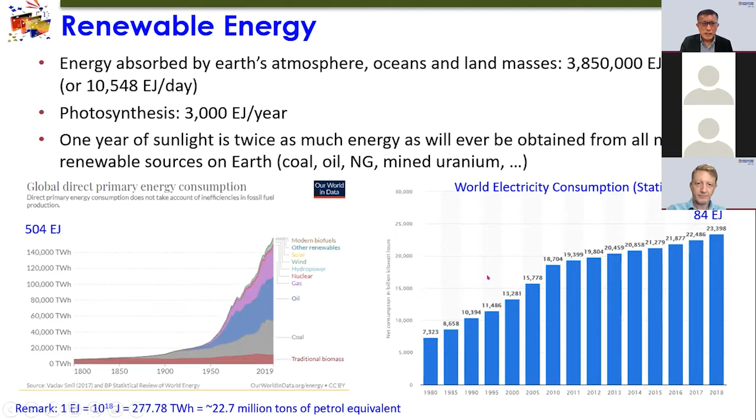So one year of sunlight is twice as much energy as will ever be obtained from all non-renewable sources on Earth, including coal, oil, gas, and uranium. Imagine that one year is not just sufficient, it's twice the amount of non-renewable sources. Since we have all this energy, then what are the issues? Just to capture a few, the most serious one is the spatial and temporal distribution of the energy.

Spatial is geographical. Certain countries have oil, certain countries do not. Certain countries have strong wind and solar energy, but certain countries have nothing. For example, Singapore has a little solar energy, but other than that, we don't have any other good source of renewable energy. Temporal distribution is a function of time. For example, with solar energy, during the daytime we have solar energy, at nighttime we do not. So it differs in the time domain. In other words, we are unable to match supply to demand.

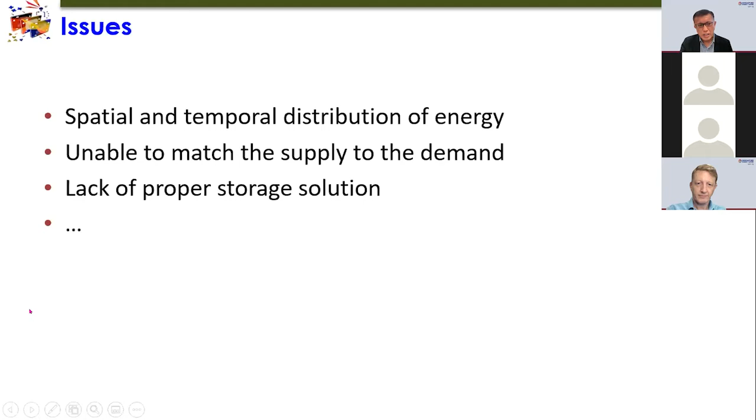And of course, there is a lack of proper energy storage solutions. Apart from this, there are many other things like financing. Certain poor countries are unable to have a power plant, even if they have oil. So there are financing issues, and also some political issues. There are many others.

I'd like to share this: thermodynamics applied to a multi-energy system. This is the only equation that I use. It is the energy balance applied to a control volume. In thermodynamic terms, all energy on Earth can be classified solely into three types: heat, work, and mass. For heat, you all know we have conduction, convection, and radiation, and this leads to heating and cooling. Work can be mechanical work, but here we would like to focus on electrical work, which is electricity. Mass is easily understood. Coal, oil, and gas, these are mass.

So if we look at a township, a city, a town, and draw a boundary around the township, then the township is a system.

It interacts with the surroundings in terms of these three types of energy: heat transfer, work transfer, and mass transfer, which is the left-hand side of the equation. So these are the so-called parameters across the system boundary, whereas the right-hand side is the change of the properties within the control volume itself, right?

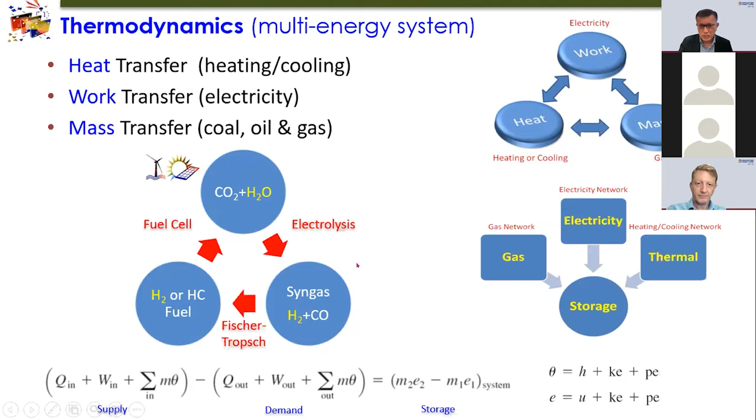This is a busy slide, and I'd like to share with you the evolution of energy use. Let's look at the right-hand side of this diagram. The x-axis is the year, the y-axis is the ratio of hydrogen to carbon, the HC ratio. We started the plot from 1800 and end with 2100, the end of this century. We started from here because hydrogen was discovered in 1766, and the name was coined in 1783, around this time. So then let's look at the red dot.

This is post-industrial revolution, where the demand for energy increased. Earlier on, we actually used wood to supply the energy that we need. Then we moved to coal, then oil, and finally methane gas. Today we use more methane than ever. As you move along the years, the HC ratio increased from 0.1 to currently 4. In future, we expect to use hydrogen when we move towards the renewable energy era. So this is the evolution of energy use.

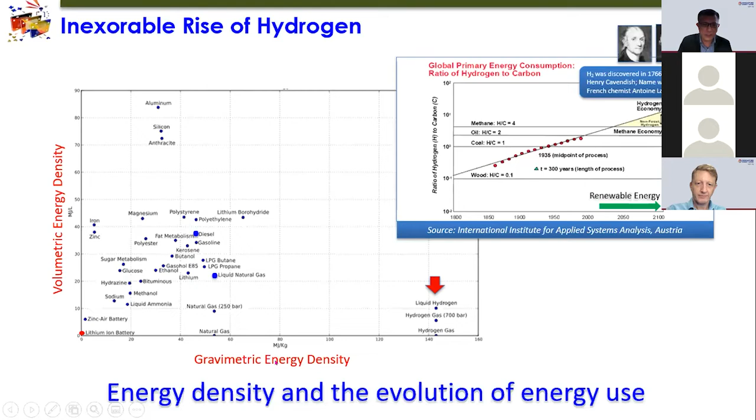But luckily, hydrogen can be compressed to increase its volumetric energy density. Liquid hydrogen is about 10 megajoules per liter. This is the highest among different types of energy in the gravimetric energy density sense. So ideally, we want to find types of energy or energy carriers that have high gravimetric and volumetric energy density.

So let's look at the demand. Energy density, particularly important for off-the-grid applications. A car requires 2 gigajoules of energy. A bus increases to 20 gigajoules. A380s, 11 terajoules. Space shuttle, 27 terajoules. And the big cruise ship is about 300 terajoules.

Right. Now let's look at what energy we have. Hydrogen, as I just mentioned, we can compress at different pressures. The gravimetric energy density, based on the higher heating values, is very high. It's not an issue. The issue is with the volumetric energy density. And look at liquid ammonia. The gravimetric energy density is not too bad, 22.5 megajoules per kilogram. And the volumetric energy density is actually higher than liquid hydrogen. So that is why there's a lot of interest in liquid ammonia for ship propulsion.

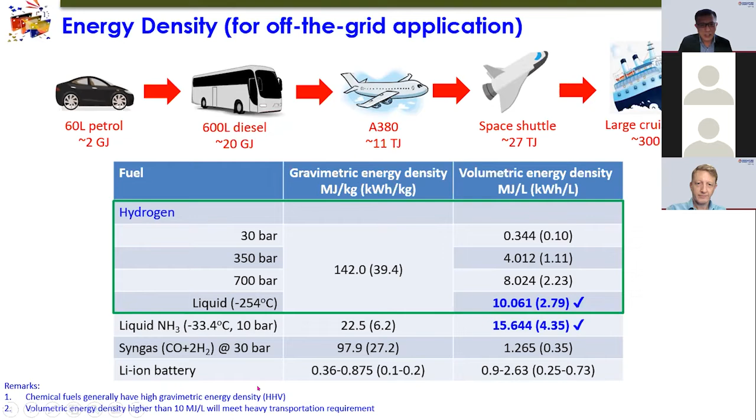Syngas itself, if you compress it at 30 bar, has a very high gravimetric energy density but low volumetric energy density. Lithium-ion battery, if you look at both gravimetric and volumetric energy density, they are low. So we can see that batteries perhaps can be used in a car, at most a bus. When we move to other types of propulsion systems, we should rule out the battery for the time being.

And this is something people always ask me: is battery useful or is fuel cell useful? So today I'd like to address this question by telling you what is a power-intensive application and what is an energy-intensive application. The y-axis is in terms of time. From 2 to 7 hours onward, we call it energy-intensive application; below that we call it power-intensive application. And the x-axis is the power. So if you look at the battery, it covers from small to big powers in terms of power-intensive application. We are talking about the 2 to 7 hours kind of range.

When we talk about higher than 7 hours, days, weeks, even seasons, we have to look at different options. The most successful ones for high power and longer time applications are pumped hydro as well as compressed air energy storage systems. And hydrogen and oxygen storage systems can actually cover this part, from low power to high power, from 2 to 7 hours onward. So these are the highlights of today's talk.

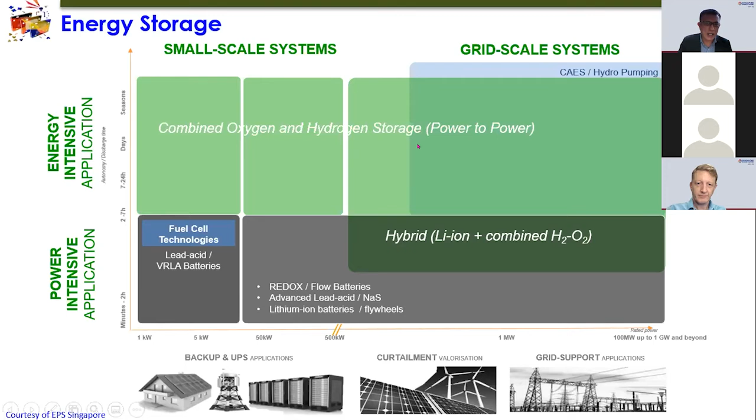Excuse me, I think I need the light. I stopped moving and the light is off.

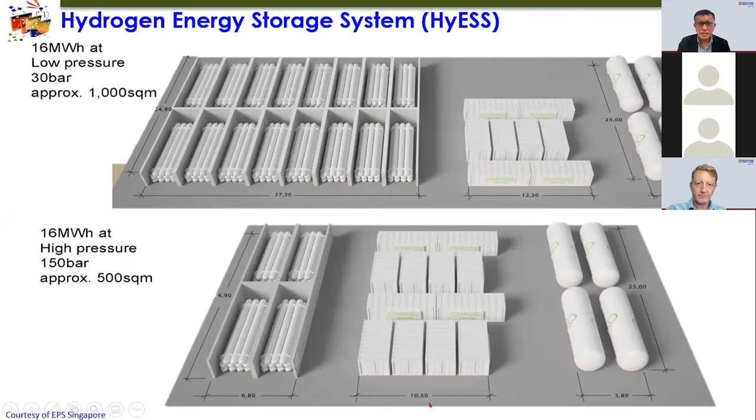So let's look at this, courtesy of EPS Singapore. I got this slide from them. So this is the hydrogen energy storage system. It can store 16 megawatt hours at a low pressure of 30 bar, and the size is about 1,000 square meters. For the same energy storage, when we increase the hydrogen and oxygen pressure to 150 bar, or 5 times, the size can reduce to half, 500 square meters. This still looks big, right? But let's look at the next slide. Look at the size comparison.

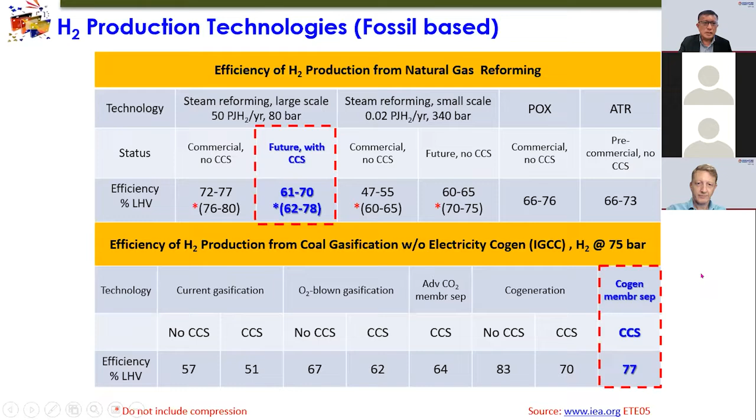The next will be by electrolysis, right? Hydrogen production based on electrolysis. We have different technologies. This is a more mature one: alkaline, large scale alkaline, high pressure, advanced alkalines, PEM, and solid oxide electrolysis cell. So this data were pulled from IEA, and PEM now is actually under commercialization, right?

Their operating temperature, the amount of energy, electricity required per kilogram of hydrogen produced, and the efficiency based on the lower heating values. Compared with alkaline electrolysis cells and PEM, solid oxide electrolysis cell has actually the best efficiency, from 85.5%, which is higher than the PEM, to more than 100%, right?

So you may question why the efficiency can be more than 100%. I have to highlight that this is the electricity to enthalpy of hydrogen conversion efficiency. And I will tell you why the efficiency can be very high.

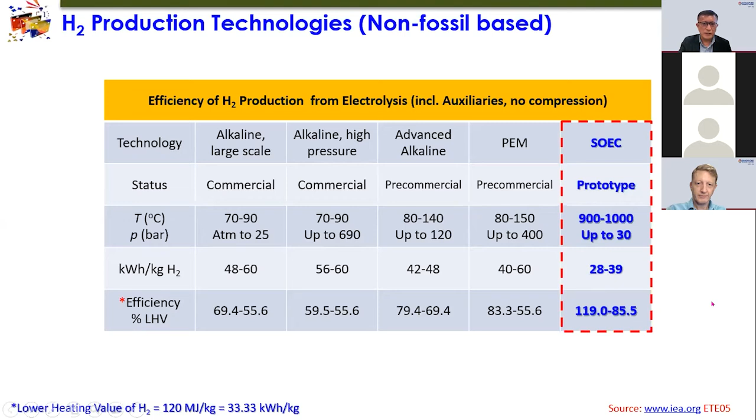Another type of hydrogen production technology is the catalytic decomposition of methane. And because this is neither blue nor green, a new term is called turquoise hydrogen, because when hydrogen is extracted from methane, it will not produce any CO2. Instead, solid carbon is produced, right?

So we propose using rotary reactors, feeding the gas, and then under pyrolysis we will generate the hydrogen and the carbon. I do not want to go into the details, but this is a new way and another method for hydrogen production without CO2 generation.

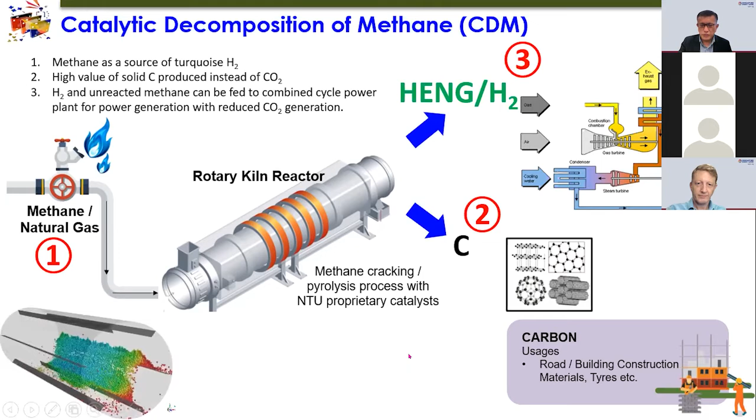So this slide gives a summary of the different hydrogen pathways. It can be thermolysis using the heat, electrolysis using the electrons, photolysis using the photon, and hydrolysis, for example, the chemical hydride reacts with water and generates the hydrogen.

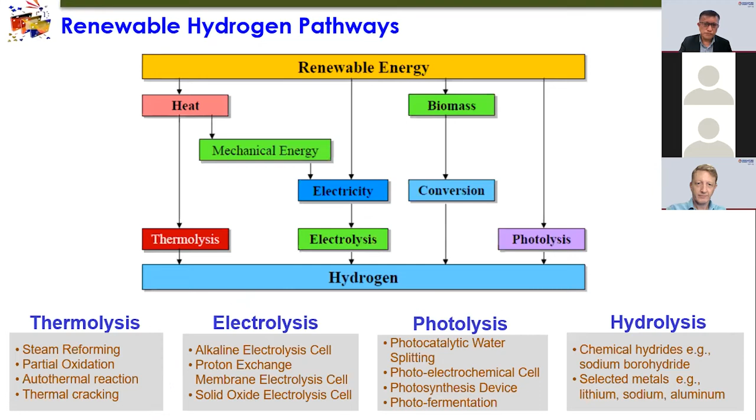So why high temperature electrolysis? Today's focus will be very much on high temperature electrolysis, right? This will also explain why the conversion efficiency in electrolysis, just like I mentioned, can be more than 100%. If you look at the heat engine, we provide the fuel, which is the source of the heat, and generate the mechanical work in a car engine, and you have a heat sink that discharges to the atmosphere. The efficiency is smaller than 1.

And the fuel cell is actually working similar to the heat engine, right? You draw in the fuel, produce the electrical work, and then you have a heat sink, so the efficiency is less than 1. But electrolysis is actually working similar to a heat pump, right? Instead of putting in the fuel source, we put in the electrical work, and then the heat is actually mobilized from the source to the sink.

So instead of efficiency, we use a term called COP, coefficient of performance, which can be greater than 1. It can be 3, can be 4, in the so-called heat pump context. The electrolyzer works on a similar principle to the heat pump. We put in the electrical work and we can mobilize the heat from the surroundings.

So the combination of the work, which is our input, plus the heat from the surroundings is actually equal to the energy sink. That's the reason why the efficiency can be more than 100%, right? And interestingly, if you look at the temperature, when we operate at a high temperature, the electrical work demand is actually reduced and the heat from the surroundings is increased.

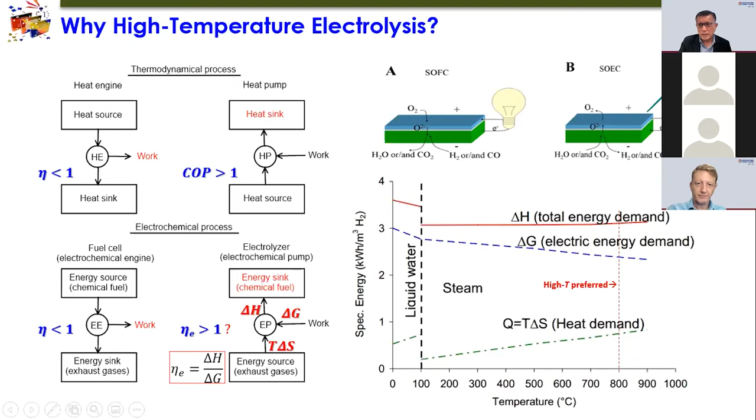And this is the output. When the temperature increases, the gap becomes bigger. So the efficiency from electricity to enthalpy is actually increased when the temperature is increased. This explains why we want to operate at a high temperature. But of course, the electricity ideally comes from renewable energy, either wind or solar energy.

Okay, electrolysis is not just simply applied to water, right? Most of the time you are familiar with water electrolysis, but we can actually apply it to CO2 as well. The first CO2 electrolysis was actually conducted for a space mission, because on planet Mars the atmosphere is mainly CO2 and carbon monoxide, and the astronauts required oxygen. So you can actually electrolyze the CO2 to produce oxygen for breathing.

So we can electrolyze water to produce hydrogen, or electrolyze CO2 to produce carbon monoxide. Of course, we can co-electrolyze the two to produce hydrogen and carbon monoxide, which is the syngas, right? So let's look now at flue gas electrolysis, especially the flue gas from an oxy-combustion plant. The flue gas is nothing more than CO2, water, oxygen, and SOx from the fuel, without nitrogen, because it's from an oxy-combustion plant.

And once it is electrolyzed, you will produce a syngas, and the SOx will become hydrogen sulfide, which can be removed later, right? So electrolysis can also apply to air. We can actually separate the nitrogen from the oxygen by using electrolysis, and this serves as an air separation, right? And wet air electrolysis: wet air consists of nitrogen and oxygen plus water. When we electrolyze it, it becomes the feedstock for ammonia. And in all these methods, the byproduct is actually oxygen.

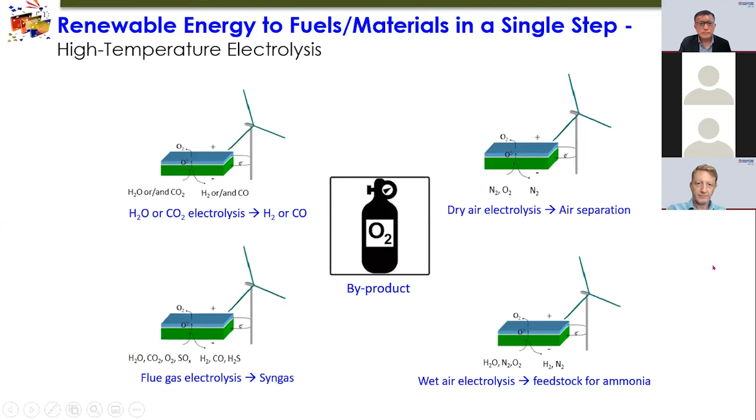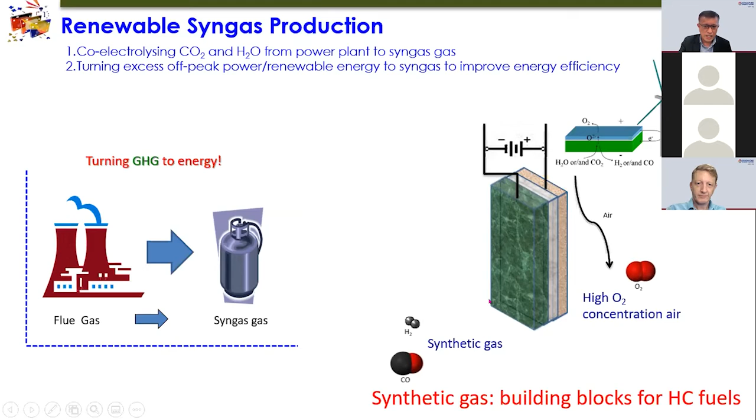Now, this is a typical case to produce a syngas. I have one animation. Going to the electrolysis, the flue gas containing CO2 and H2O will ultimately become a synthetic gas, and the byproduct is oxygen. So this is a single step. By injecting the electrons, you generate the syngas.

So this is a typical oxy-combustion plant. Essentially, you have two systems: one is the oxy-combustion power plant, and the other one is the solid oxide electrolysis cell. The flue gas from the oxy-combustion plant contains rich CO2 and H2O, and also the waste heat. Once the gas is electrolyzed, it will produce the syngas, and we can use the excess energy from the power plant or from renewable energy. So essentially, we bridge the fossil energy to the renewable energy, in an energy transition era.

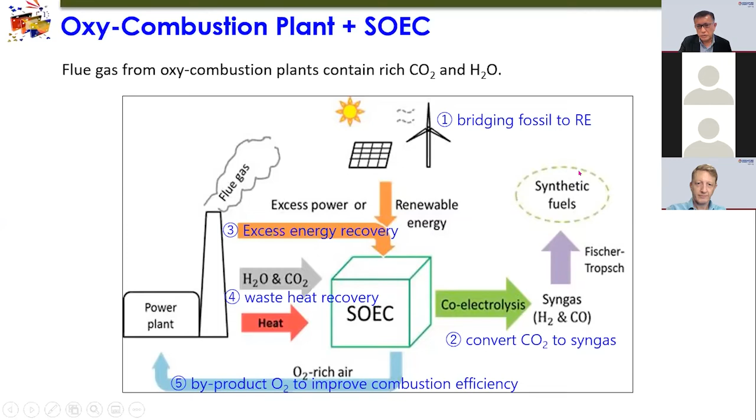And interestingly, the oxygen, which is the byproduct from the electrolysis cell, can be channeled back to the power plant. You know that the power plant requires a lot of oxygen, so this oxygen can be used in the power plant. And the syngas produced as a result of electrolysis can further convert to synthetic fuel through a Fischer-Tropsch kind of process. Now let's look at the numbers. You have a power plant and you have an electrolyzer.

Assuming we burn methane, we require 2 moles of oxygen to generate 1 mole of CO2 and 2 moles of water. Once we use renewable energy to electrolyze it, we produce 1 mole of CO and 2 moles of hydrogen as a syngas, and the byproduct is 1.5 moles of oxygen. We can feed it back to the power plant. So we require 2 moles and we are short 0.5 mole. The 0.5 moles of oxygen can be obtained from the air through the dry air electrolysis I just showed, again using renewable energy. And we can form this closed loop.

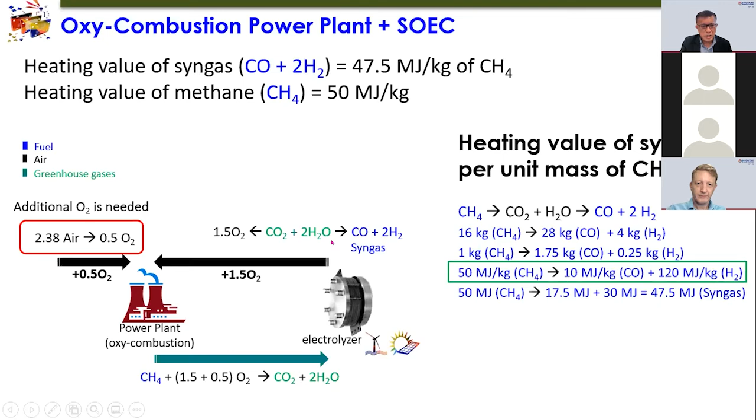And look at the heating values of the syngas per unit mass of methane burned. Methane produces 1 mole of CO and 2 moles of hydrogen. So 16 kilograms of methane produce 28 kilograms of CO and 4 kilograms of hydrogen, and we make it to a per kilogram basis. These are the heating values of methane, carbon monoxide, and hydrogen. By considering the heating values, 50 megajoules of methane, which is 1 kilogram of methane, produce 47.5 megajoules of syngas. And this energy is actually taken from renewable energy. So we form a closed loop, carbon neutral. The carbon is reused and routed back to the power plant.

So let's look at the electrolysis. The SOC, or solid oxide cell, is the only technology that can run in fuel cell mode and electrolysis mode reversibly, using a single device. Unlike other technologies, like PEM fuel cells and PEM electrolysis cells, which are totally different devices. The solid oxide cell allows you to run in the different modes, producing either electricity in fuel cell mode, or hydrogen in electrolysis mode. And the hydrogen can serve as energy storage.

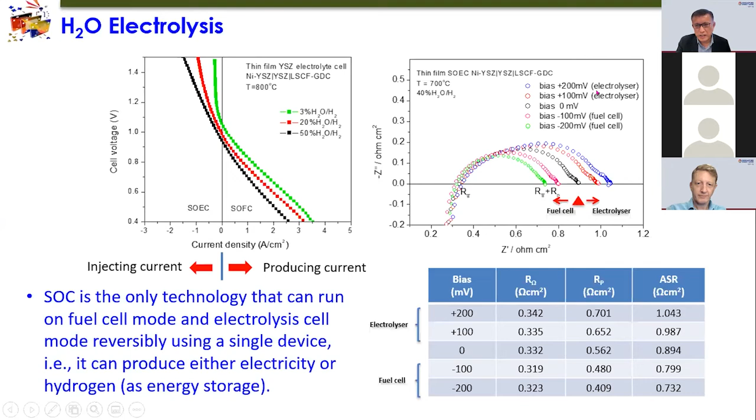So let's look at this slide, showing the different atmospheres again. I would like to share with you two important parameters. One is the current density at 1 amp per square centimeter. The higher the current density, the higher the yield, right? So what we want is to achieve a reasonably good current density at low voltage. Just like I mentioned, the lower the voltage, the higher the efficiency will be.

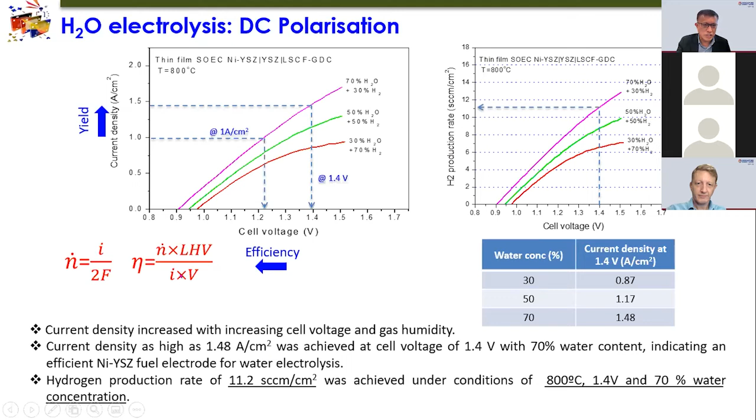Another criterion is, if you compromise with the efficiency, say at 1.4 volts, what will be the yield, the current density, which is related to the hydrogen production rate. We all know that 1 amp is equivalent to 7.6 cc per minute of hydrogen generation. And we can easily calculate the hydrogen production rate from the current. From the current divided by 2F, you get the molar rate, multiplied by the heating value, divided by the power, then you get the efficiency.

CO2 electrolysis shows similar trends in the DC polarization as the water electrolysis. The electrolysis current increased with the CO2 concentration because this is the feedstock. And the higher the temperature, the higher the current density will be. So higher temperature will be favorable to the yield from CO2 to generate carbon monoxide. A typical limiting current density behavior was observed at high voltage, especially the lower concentration of the feedstock will reach the limiting current.

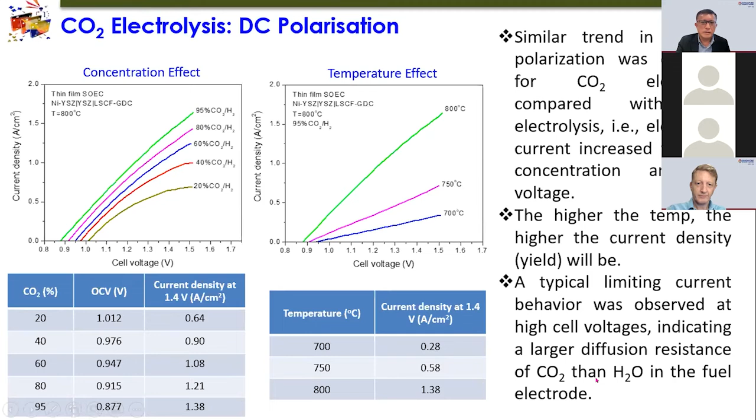Now let's compare the water and the CO2, coming to an end. Bear with me. So we have various electrolysis behaviors, i.e. water electrolysis, CO2 electrolysis, and co-electrolysis, which is the case of CO2 and hydrogen, because the CO2 and hydrogen will first go through the water gas shift reaction to generate water, and with the remaining CO2, the electrolysis is simply the case of co-electrolysis.

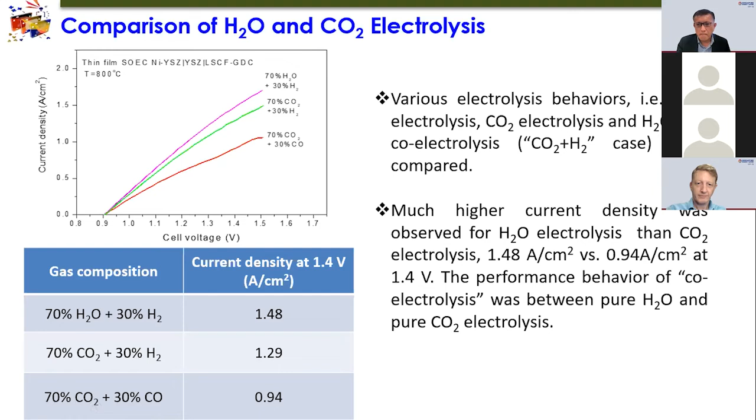Much higher current density was observed for the water electrolysis than the CO2. You can see that, right? So this actually tells you that water is easier to electrolyze compared to CO2. And this is the co-electrolysis. Remember we mentioned that in an oxy-combustion power plant using methane, we will produce 1 mole of CO2 and 2 moles of water in the flue gas. Now we have 3 cases.

The co-electrolysis performance of the cell was slightly improved with increasing the water to CO2 ratio, from 1 to 2, 1 to 1, and 2 to 1. 2 to 1 is actually this case, 2 moles of water against 1 mole of CO2. And you can see that they are actually more or less the same.

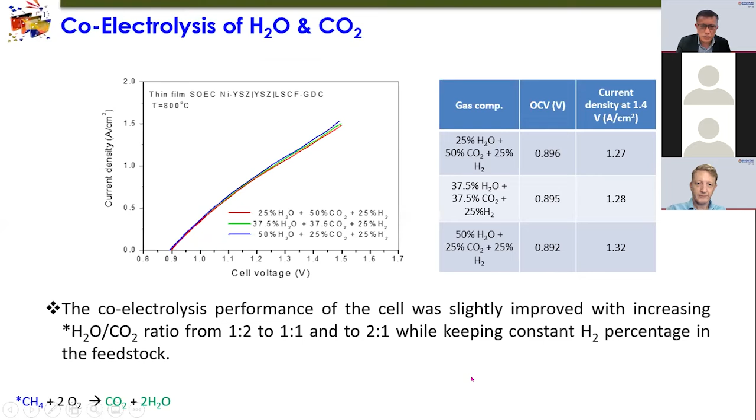This diagram shows you that co-electrolysis is possible, and it is not very sensitive to the ratio of water to CO2. You can see from the polarization curves they are more or less the same. And if you look at the OCV as well as at 1.4 volts, the currents generated are more or less the same. So co-electrolysis using the SOEC is possible.

Now I'd like to conclude. Energy storage is an essential component in any energy system due to the mismatch of supply and demand. And the energy storage issue is amplified with increasing penetration of renewable energy, especially those with an intermittent nature. That's why you have to store it. Converting one form of energy to another based on the need would reduce the physical size of each storage. So that's why we introduced the co-electrolysis of the flue gas. We wanted to convert from one form to the other.

Hydrogen, the fuel cell and the electrolyzer can facilitate the energy conversion among heat, work, and mass in thermodynamic terms. Converting water and CO2 to syngas in a single step is possible by high temperature electrolysis.

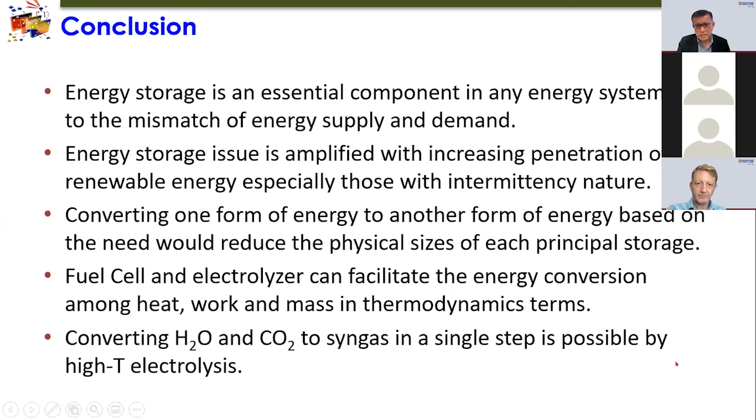Thanks, Prof. Chan, for giving us a wonderful talk, which has given us a big picture about the energy system, as well as some knowledge about how hydrogen and fuel cell technologies can bridge the gap towards a sustainable future. So right now we have the Q&A session.